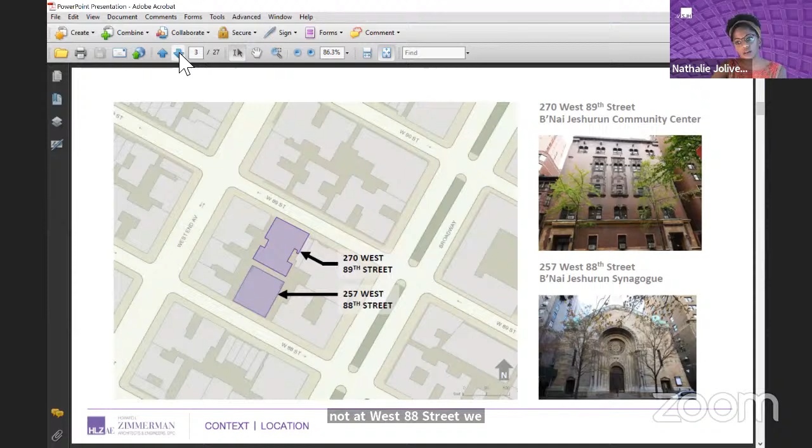So as Lauren was mentioning, the north facade located on West 89th Street is the most prominent. And then on the south, at West 88th Street, we have the very memorable facade of B'nai Jeshurun synagogue itself. Just to note, the two buildings are actually annexed, but they have separate BIN numbers, so they're treated separately under separate applications.

Okay, can go to the next slide. Over here, this is a closer look again of the building and all of its components, in relationship to its adjacent buildings and how tall they are. Our building, which is in purple, is a 7-story building with different heights. Then on the south, you can see that the number C is the annex or attachment between the community house and the synagogue.

Here in purple, we have in general notes, kind of an overview of the windows that are in scope. So all of the windows are in scope, but again, as Lauren was explaining, in this presentation we're mostly going to be concerned about the steel fire rated windows and the lot line facing windows. And this might be it in terms of context.

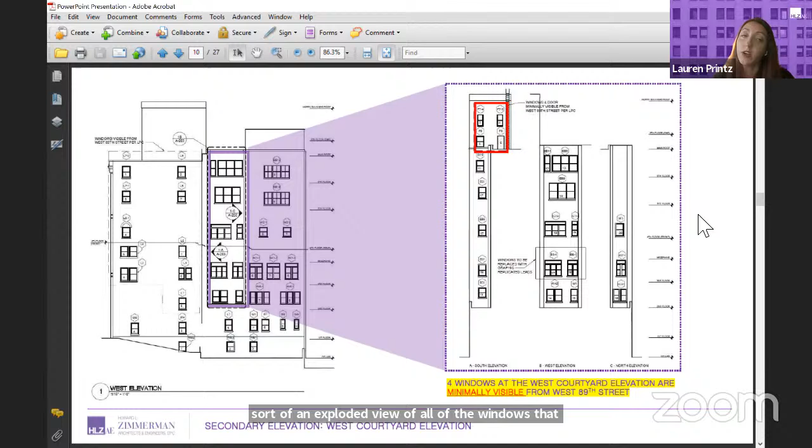This would be the visible steel fire rated windows from the west side of the building. And again, just showing you an exploded view of all the windows that encapsulate that west courtyard. Both courtyards are not visible from the street, but there are a number of fire rated windows located in these areas.

This is the best view that you can see of the south elevation. In this red highlighted box, we have 2 fire escapes that flank the east and west sides of the south elevation, which is important because a lot of our windows face the fire escapes. Along with doors and windows serving these fire escapes, it's extremely important that these items are operable. This is one of the sticking cases of our window replacement project to date, because some of the windows are inoperable.

They're well past their life. This is a very crucial part to maintaining life safety of the occupants inside the building. And of course, you can see the landmark Jeshurun synagogue in front.

So getting into the windows themselves, as some of you may know if you're familiar with the building, we have existing fire rated wired windows. I would say probably previous to the 1980s is when we started getting away from wired glass in fire rated glazing assemblies, and we went more towards clear fire rated glazing.

So what you see here is somewhat of a historic window assembly. We have a traditional fire rated steel double hung window that's prevalent all along the east, west, and south facades. And then what we have on top is what we call a modified sash or an applique.

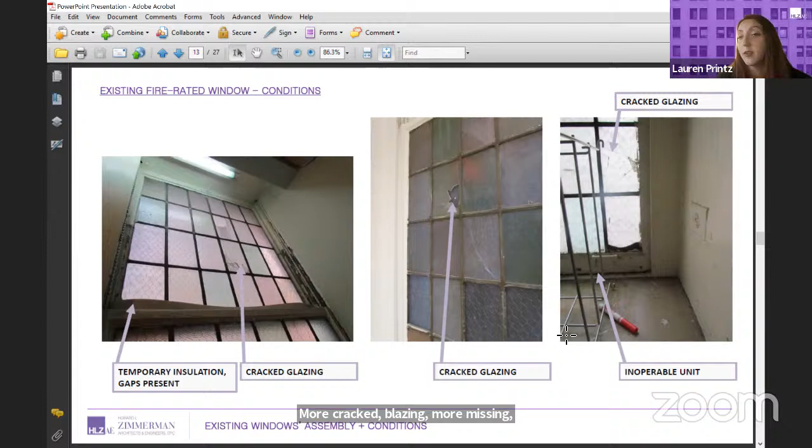This photo on the left is just showing you more deficiencies that we find in the classrooms and offices. The residents have taken it upon themselves to start stuffing insulation in the gaps just to get through the winters and also to keep energy loss low in the summers. More cracked glazing, more missing glazing that presents to be an issue. And again, a lot of the windows are inoperable.

I wanted to touch base on this space in particular. This is located on the 6th floor of the community house. This is their gymnasium for a number of their tenants or school-age children. The windows were in such a state of disrepair that they had to put some safety glazing up in order to accommodate the needs of that new purpose space.

The safety glazing has taken a beating over the years, but it's sort of doing its job. As a result, it renders the existing windows on the exterior of the safety glazing completely inoperable. You can't get to them at all. So this has essentially left the windows to continue to deteriorate in a state of disrepair, and there's actually no way of getting to them unless you dismantle this entire window assembly with the safety glazing.

So this is also becoming a large problem for B'nai Jeshurun, because as these windows continue to deteriorate, this is on a very high level of the building, on the 6th floor. So we certainly don't want these windows to be failing and any broken glass falling into the interior courtyards.

Now we'll get into the proposed product. Some of you may be wondering why we are presenting this to you. As you know, the wood windows are under staff level review.

That's the front of the facade, but the remaining 3 facades, because of the applied nature of the lead caming and the colored panes, our LPC preservationist advised us that that alone makes them a special window. The windows themselves aren't special in that they're square frames, either 1/1, with a fixed transom. So in essence they're not particularly special by LPC guidelines, but because of the applied applique done sometime in the history of the building, the preservationists felt that automatically triggered a public hearing. And so we bring this in front of the community board number 7.

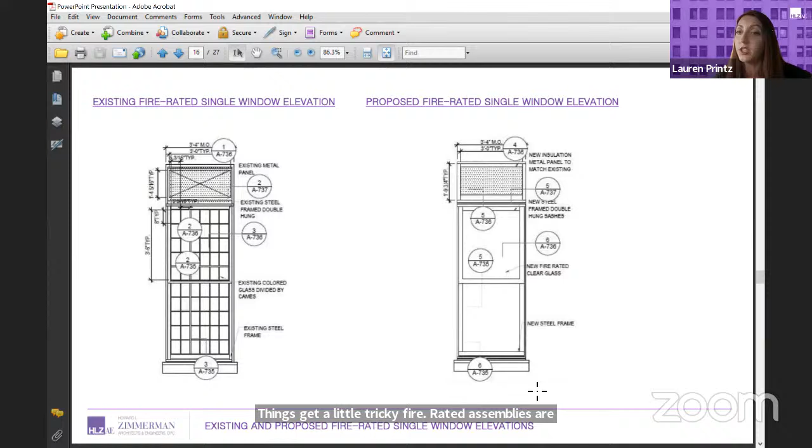In some ways, whenever you make an applique to a fire-rated assembly, things get a little tricky. Fire-rated assemblies are tested and UL rated in laboratory controlled testing. As such, modifications to fire-rated windows either have to be extremely custom through the manufacturing and also tested separately, or they're left alone.

Any modifications to a fire-rated assembly that is not laboratory tested or rated can essentially fail the rating and cause issues with life safety. So we made a decision between LPC and B'nai Jeshurun that we wanted to focus on the safety of this project, and that means giving them operable, clean, modern-looking, safe windows that they can continue to use their beautiful space with.

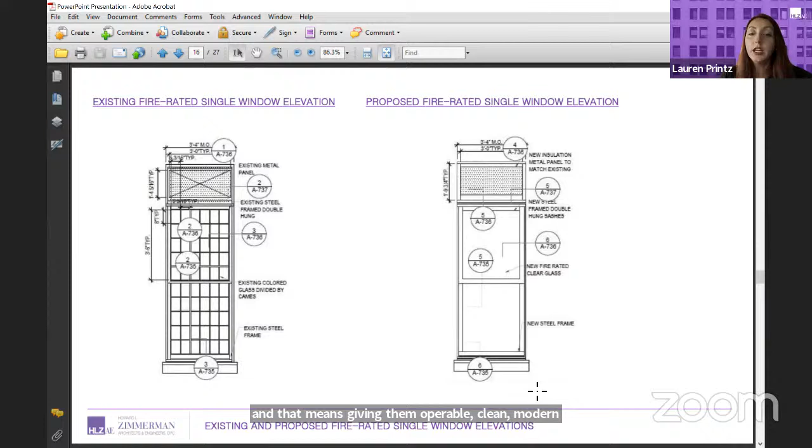So here we're presenting to you just one example of the many windows that are present on this building. Most of them are double hungs. Some of them feature transoms. Some of them also we have to accommodate existing HVAC ductwork or equipment that's already running through the existing windows. Hence why in this elevation here, we're showing you that we're including a new insulated metal panel, so it can accommodate their HVAC needs per space within the building.

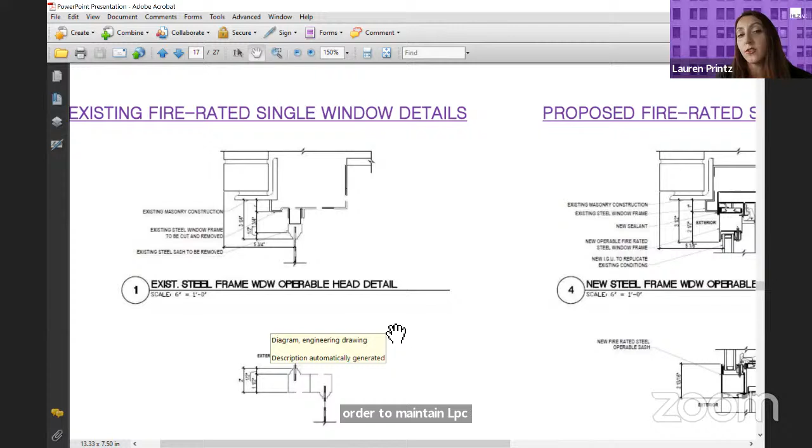These are our existing typical details versus the proposed fire-rated new window details. The important things to note here are that we are planning on salvaging small pieces of the frame in order to maintain LPC sightlines. This was something suggested and worked through between us and LPC. Over here we have the existing frame. It has a small lip here that comes down and returns up. The other thing important to note is, unlike other buildings you may have witnessed, the fire-rated windows here are installed behind the masonry lintel. They're installed within a masonry pocket in the wall. So we had to do some engineering in order to fit the new window into the existing pocket. But we did leave this small profile on the heads and jambs for LPC consideration, to make the windows best match the existing sightlines as much as possible.

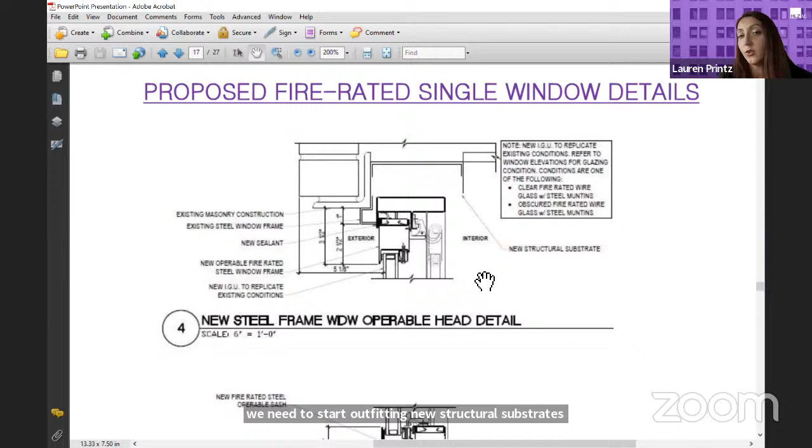We come to our proposed window head detail here, in which we want to maintain that profile that I was showing you in the existing. We want to salvage that, and the new window will be inserted into the old masonry pocket. Upon further investigation, once we get into bidding and construction, we plan to do some probes in the masonry pockets themselves, because we need to start outfitting new structural substrates and supports to anchor the new fire-rated windows into the masonry pockets so that they will be adequately secured to the building.

The sill details are very similar compared to the window we're proposing. Here we have a very nicely pitched window sill that we are intending to cut most of out and remove. Again, we are trying to salvage as much of the frame profile as possible. So you can see here we are proposing to leave basically three quarters of the entire remaining existing sill, and we want to insert our new fire-rated window assembly into that pocket. That way we maintain the existing sightlines from the exterior view.

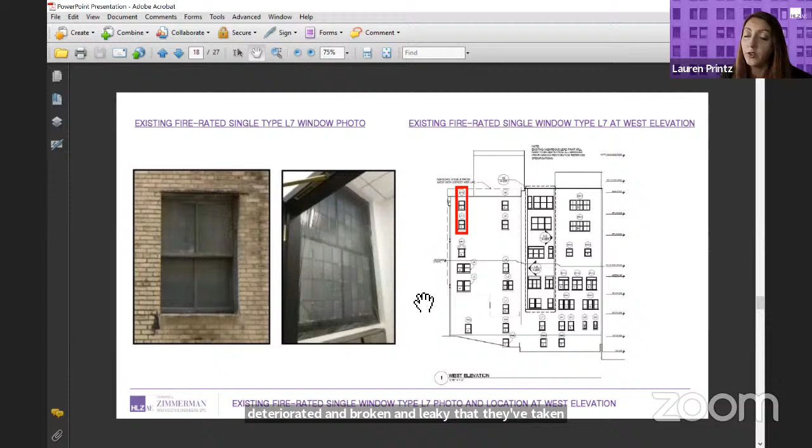So just showing you another example of typical fire rated windows. Now some of them have a muntin in the middle. And you can see on the inside here, this is one of the areas of B'nai Jeshurun currently where the windows are so badly deteriorated and broken and leaky that they've taken it upon themselves to put plastic over the entire window face just to remain comfortable.

So here, again, we are proposing to mimic the same configuration of the existing historic configuration without the applique. This shows that we intend to match the glazing exactly how it was. Some of these windows serve spaces that are bathrooms, locker rooms, or changing rooms, and for that reason we have to specify obscured glass to maintain privacy for the program of those functions.

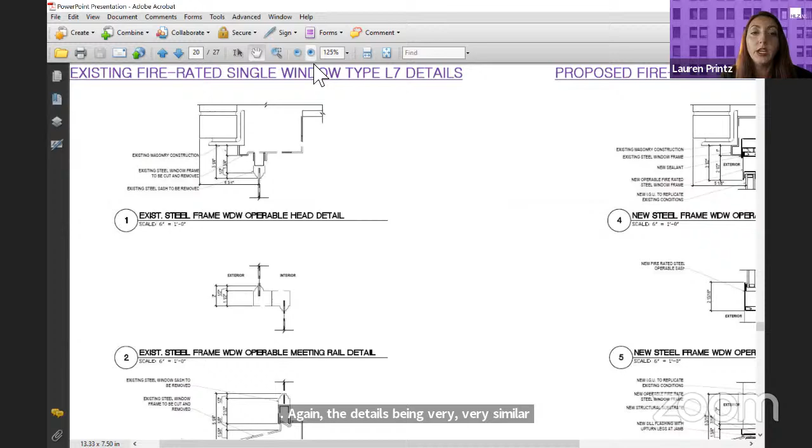Again, the details being very similar, really no matter what the type of window, we intend to keep the existing profile lip, installing a new fire rated window frame into the pocket. And then of course, the new structural substrate that we will be specifying once we get into bidding and construction. And the sill details are very similar as well.

These are just showing the windows in the courtyard, very similar to what you've seen before—double hung windows with a fixed transom. These are located in the east elevation courtyard.

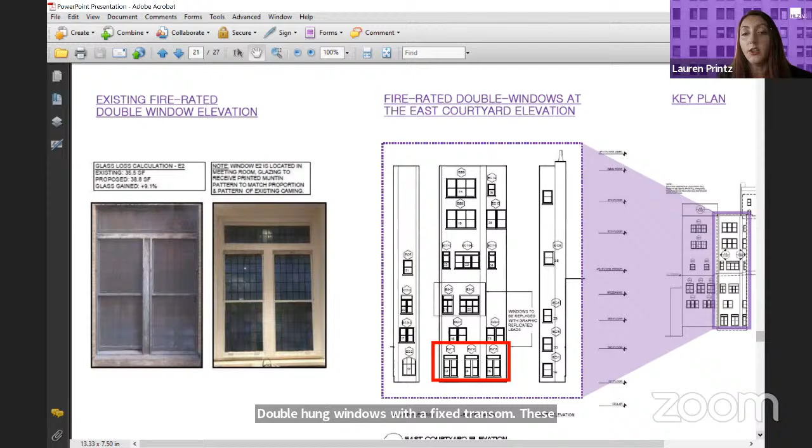If you notice, I'm only showing you some of the windows. The fire rated windows existing with the applied applique, lead caming, and colored glazing only really represent maybe 25 to 30% of all the fire rated windows. Most of the fire rated windows in this building are clear glazing with no lead caming or applique, and the details for these proposed options are very similar.

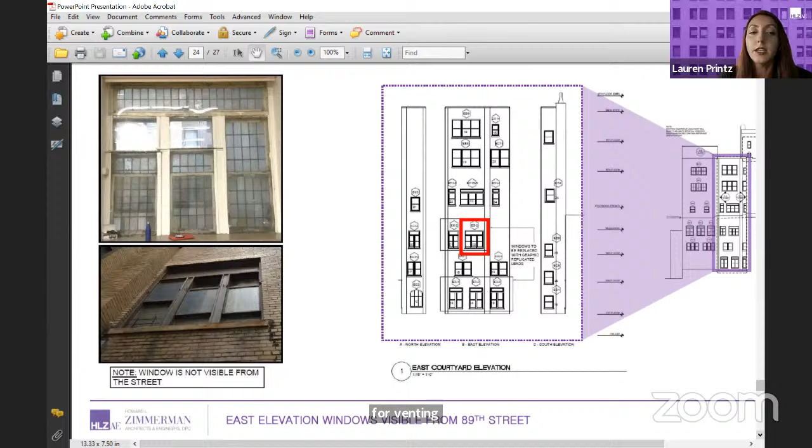It's another example of a triple configuration with the safety glazing. We intend to replace the safety glazing with options for venting when we get into the construction, to maintain the gymnasium program of that space, and again, to protect the windows. Again, very similar details, whether it's a triple, a double, or a single.

And that concludes the overview of our presentation. All right, thank you very much. That's a lot to take in. So I wonder, are there questions?

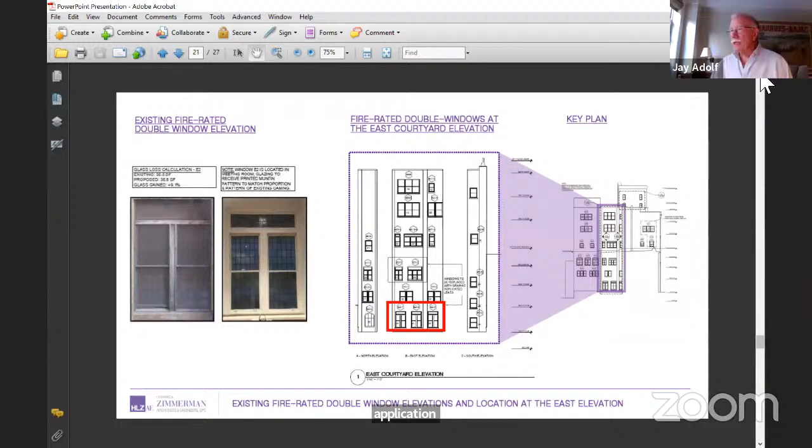You said that a certain percentage of the windows you're applying to replace have divided lights that are not really divided lights, but an applique to single-pane 1/1 windows or however. But how long has that configuration been in existence on this building? The applique, which creates at least the appearance of divided lights — we've been able to trace it to tax photos from the 1960s. Those were interior photos; I don't have any interior photos of the building that predate then. As we know, the community house has been around for a lot longer than that.

Yes, I know. All right, so my question is — I don't know if since the 60s, maybe Paige can answer this when she's speaking, whether that qualifies at all as historic. But my question is, being able to do this, I understand the windows have to be operable, I understand they have to be safe, I understand they have to be fire rated. So my last question is, with all that, why can't they be divided light windows?

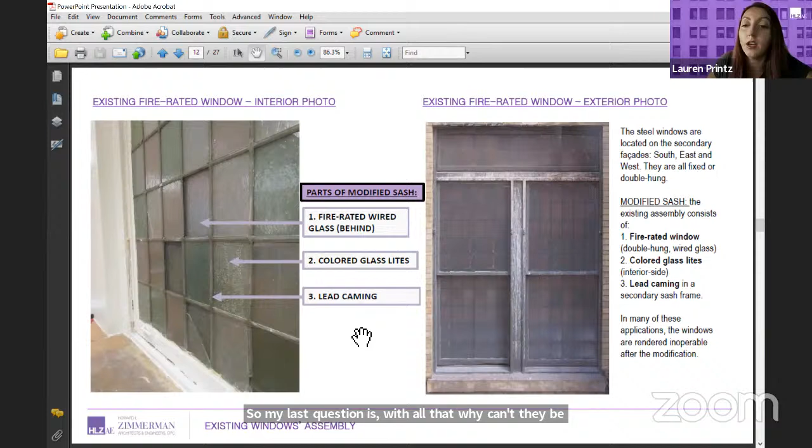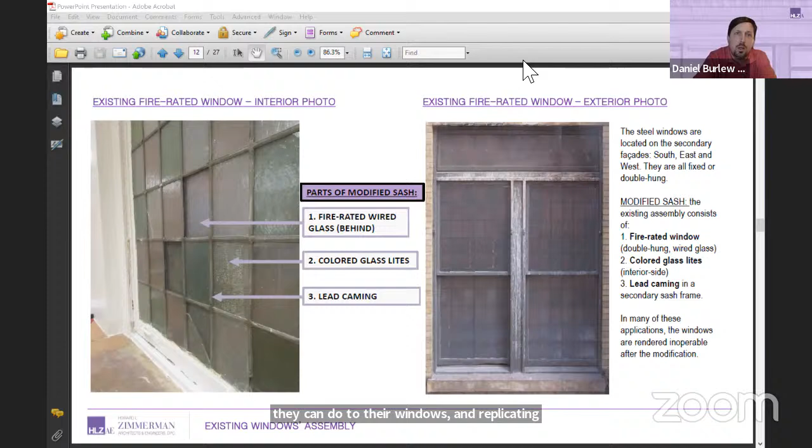Well, let me take that one, it's kind of window-technical, in my specialty. The product that's been specified, the double-hung window, is only available in the market to satisfy us because there's only one company that really makes operable, fire-rated windows, and that's Optimum. Optimum offers very limited modifications that they can do to their windows, and replicating the applique as shown, even with the grid pattern and omitting the colored glass, is not something they're able to provide.

So they're the only company — it is the bane of my existence. I mean, we have all kinds of window replacement applications before our board, and correct me if I'm wrong, but I assume that when all of these window replacements are done, they all have to be fire rated.

That is a very fair assumption to make, and I have run into this over my decade-long career in fenestration, dealing with windows and doors. If you need a fire-rated double hung, I believe it's 90-minute, actually, Lauren, that we're installing here, not just the 45 that code mandates.

So then we may have some more options in front of us, but right now our main player is dealing with Optimum, and I can tell you the other fire-rated manufacturers customize even less than they do. The main challenge with replicating the caming is how narrow it is, making them even a simulated divided light would be difficult. A true divided light would be almost impossible for a double-pane glazed window, and even for a simulated version, they don't offer the ability to put the muntin in the center of the glass.

So it would be very apparent that it's masquerading as something it really isn't. I'm surprised, I have to say, that that's the case, but I take your word for it.

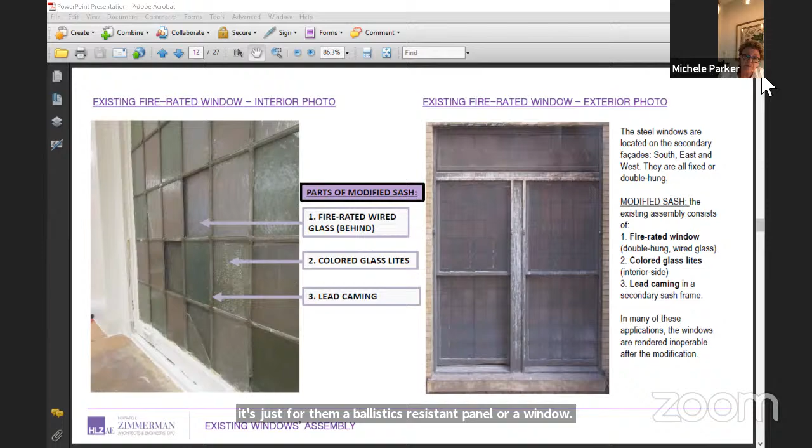Every single window will also have a ballistics resistant panel or window. Every single window will be ballistics resistant. No, not every single window, let's clarify that.

To the front facade, the historic photo works just fine. So the three windows that flank either side of the main entrance doors on the ground floor, those windows in particular were requested by Jeshurun to install a ballistics resistant safety glazing assembly on the inside of the window. That has already been installed.

That was a little bit of a hiccup between our scope and the community board 7 representative, because that work has already been installed. It didn't require LPC review because it was installed on the interior, which you can't see from the exterior. Not even at staff level. Staff didn't even review that with you.

No. Okay, now the doors were replaced under a separate application, a permit for minor work. They also have the same ballistics resistant safety glazing and door assembly in those two doors. So in case you're familiar with the building and notice new doors there, the reason was safety concerns. It's hard to see because of the scaffolding, but you will see it one day.

All right, I think I have one more question, bear with me. You said the 6th floor is used as the gymnasium for the school, but there are some windows you want to do something with to keep the privacy. Which windows are you glazing, or are you? So it's two things.

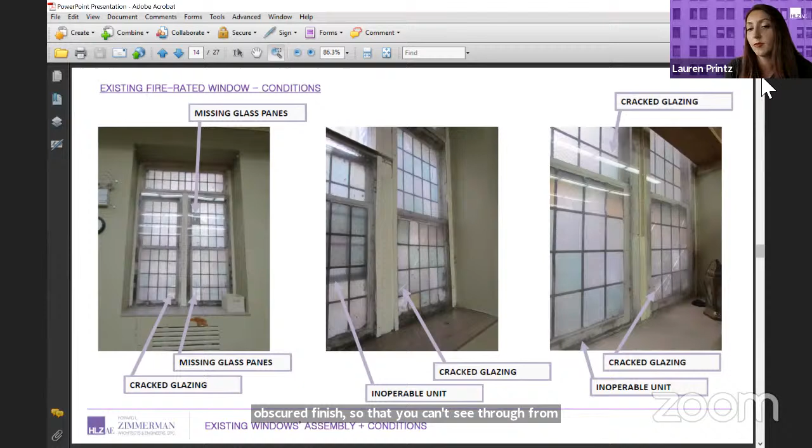And then you're talking about the obscured glazing. There are some examples where these windows face bathrooms, changing rooms, and locker rooms. Those windows will contain a fire rated glazing with an obscured finish so that you can't see through from outside or inside. Let me just hold on for a second.

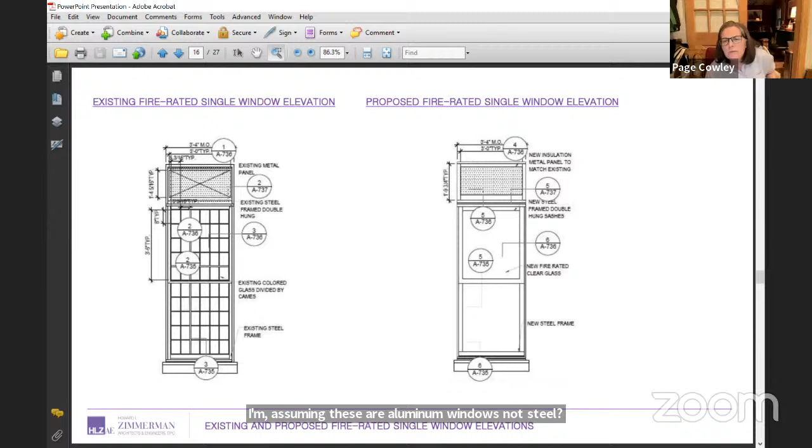Right, correct. The concern I have is here—there are ways that you can recreate, not for all of them, I wouldn't ask that of you, because not every space needs to have these beautiful pastel colors. But what my practice has done for other churches we've worked on is follow as closely as we can with the steel window. I'm assuming these are aluminum windows, not steel? No, the windows are being replaced with steel fire rated windows. Okay, because I didn't see—oh, there it is, new steel frame, my bad.

Once these windows are removed, you won't see any color on this building, and this is one of the charming features I feel of it. And the fact that you can see it through the center of the block is testament that I think it would be a shame to lose. And I would challenge you to rethink how you can keep the colored glass, at least for the majority of the spaces.

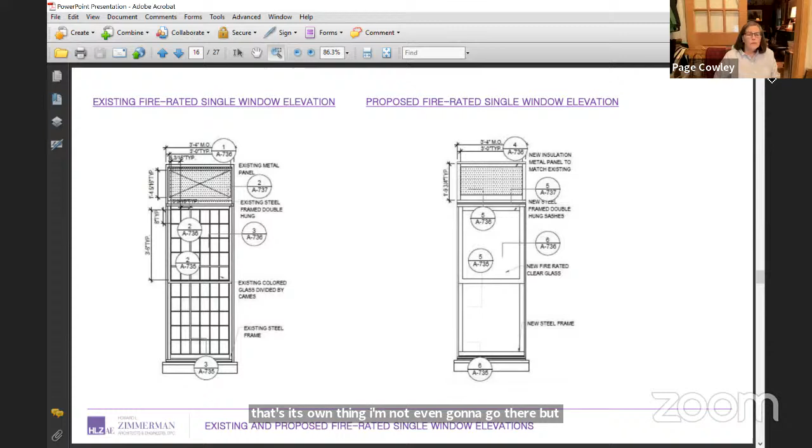So right now I'm sitting on the fence and having a very hard time trying to accept this design alteration. Page, thank you for that, it's very insightful. It's obviously nothing new, as I told you, I've had this application open since 2017. Certainly nothing that hasn't come across our thoughts before. We've been working with Colin for a very long time to get this to where it is.

What I can tell you is a couple of things. The windows that we're proposing to replace, I wanted to show you this elevation in particular. All of the special windows that I've shown you are actually below, adjacent to the synagogue, and also inside these interior courtyards. So they're not quite as visible to the street as we're somewhat presenting them from this bird's eye view.

The other thing to note is that, as I said, we spoke with Colin about this, and there are conversations about possibly doing something on the inside to speak to the historic integrity of the building. However, we are not necessarily putting that under our LPC review because it's not on the facade level—it would be interior to the building, which you wouldn't see from outside the street.

Can I ask you one other question? Thank you for your explanation. I'm not convinced yet. But the other question I have is about the ballistic glass, the impenetrable one for the windows. I'm assuming these are going to be operable as well. And where are those ballistic glass windows going to be installed?

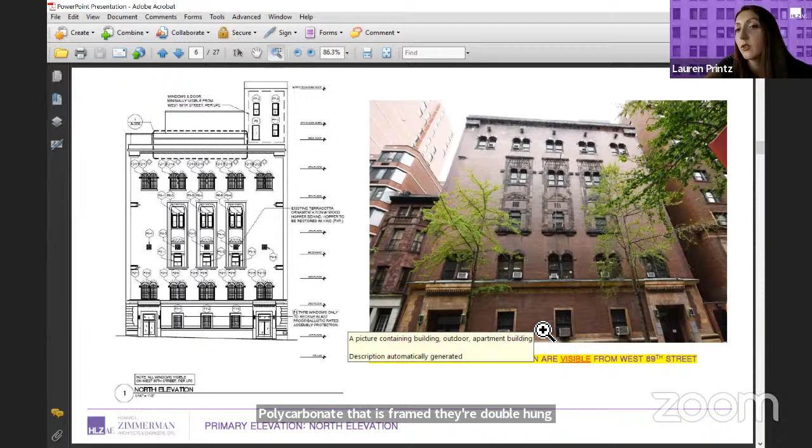All right, thank you, Page. One item I just want to stress, and Page, thank you very much—that's wonderful to hear another architect say that about a building. The main integrity of the building and the stained glass on the north face is going to be maintained. Everything of that is going to come back. These are secondary facades that are largely invisible to the street that will be undergoing this modification.

And the other part I want to stress is that we are trying our very best to actually match the existing sight lines that are present there now. That's part of what Lauren talked about in the cutting of the frame and inserting the new window within it. Doing so allows us to match the historic integrity of the building and its sight lines. And while we may be losing that lead caming element, we're at least trying to preserve that much with it as well.

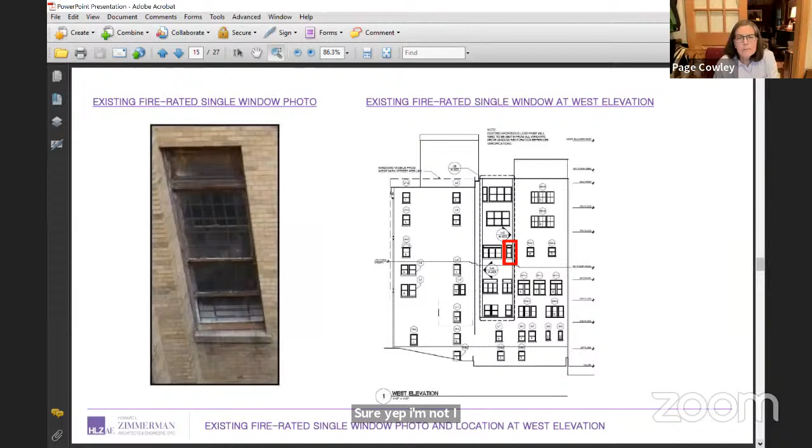Do you have a drawing of that you could share with us? Sure. I can't remember—in your presentation you showed us so many variations. It's this one. The details for the single, double, and triple are largely the same.

But if you'll note, the 3 and a half inch sight line is roughly the same. So this area here—overall the sight line we are trying our very best to maintain from the masonry opening to the glass. That is definitely our intention here. I believe the frame is 3.5 inches, so we're hiding almost a third of the frame behind that existing cut profile. So you're going to see an exterior frame view of around 2.5 inches.

May I speak? Please, Colin. So Page, I appreciate what you shared, and I just want you to know that we're really trying to thread the tension between what we need to do to maintain the building, make it safe, and make it environmentally sound—while also respecting the historic integrity of the building, but also in the context of a very different use case. For example, the gym, the third floor space, was built as a ballroom. Most of the building as imagined and built in 1929 is very different than the way it is occupied today, and we're trying to figure out the best approach.

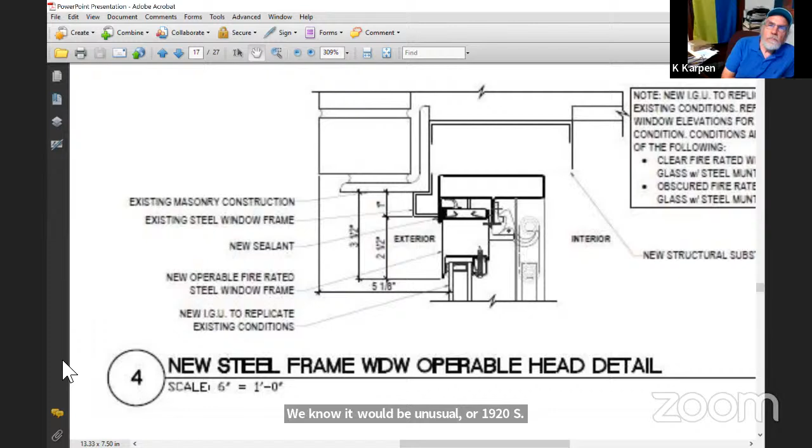No, it's not. I won't say it was common to apply glass on top of glass. I've not encountered this, although I can't claim to have seen enough to know all. But this is certainly a special case where they've welded this lead caming onto the existing window frames at some point. I won't say definitely, but I can tell you it's not a standard feature of the classic Pomeroy steel frame windows that these appear to be. So they were definitely added, whether immediately following their installation or sometime after, at some point leading up and all the way into the 60s.

We can't be sure where in that time frame between the early 1900s and the 1960s they came in. So a related question that follows is whether the designation report, when the building was designated for the district, addressed the question of whether the caming and colored glass was original or not. Silent on the issue. Okay.

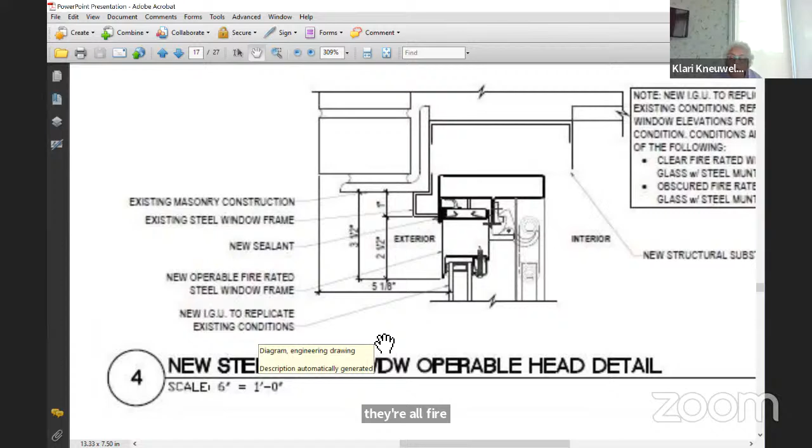It makes very little difference. The other question I had follows up on something Jay asked a while ago, and it's really for my education here and maybe that of others. I think Jay's premise was that in the many other window replacement applications we've had, they're all fire resistant windows. That's not been my impression. My impression is that these fire rated windows are relatively unusual and not what we typically see in window replacement applications—you may not be familiar with that because this is your application and the others are not. But what is it about this situation, this building, that requires fire rated windows, if it is indeed the case that that is not generally true with window replacements?

It's the proximity to adjacent buildings. The lot of the community house is very small, and the distance measured from the property line to the next property line is too small for you to have a non-fire rated exterior enclosure. I see, so they're not lot line windows, but they're close to lot line windows, and that's the reason you need fire rated windows. Whereas I would think the vast majority of window replacement applications we see are not required to be, and are not, fire rated. Is that right?

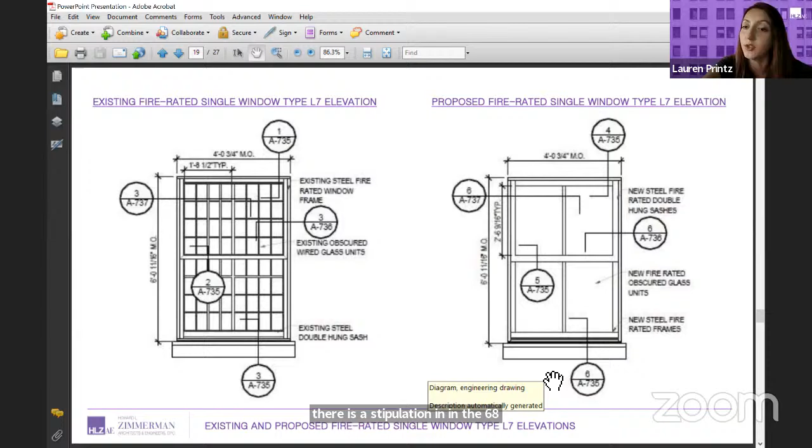And so there is a stipulation in the '68 code in which the only exception to this rule is churches specifically, and we could not make the case that the community house is a church. So we find ourselves defaulting to the conservative code, which is fire rated windows, which also supports the existing window assembly we see installed. So we certainly wouldn't want to ever reduce the fire safety rating—we would only want to meet or enhance it.

Thanks, this has been educational and I appreciate your answers. And in order not to speak a second time, I will say that with regard to the caming and the colored glass, while I don't love the fact we're not going to see it back, I can support this, will support this as presented. Thank you. Thank you, Klari.

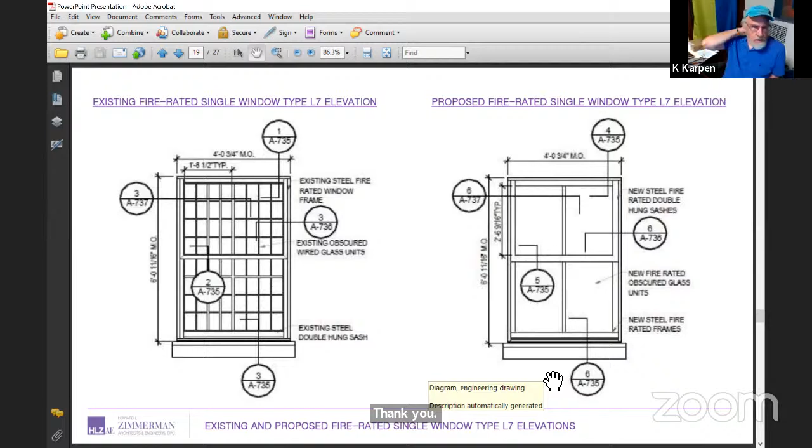Any further questions from the committee? No, Leaf, okay. Page is waving her hand. I forgot to ask one question—sure. Are you using wired glass, or since you say obscured glass in the windows, is it going to be wired or obscured?

Most of the windows for clear glazing are going to be ceramic fire rated glazing. They will only be obscured in areas of bathrooms, changing rooms, and locker rooms. And no wire glass? No wired glass in this application. Okay, thank you. Sure, all right, thanks.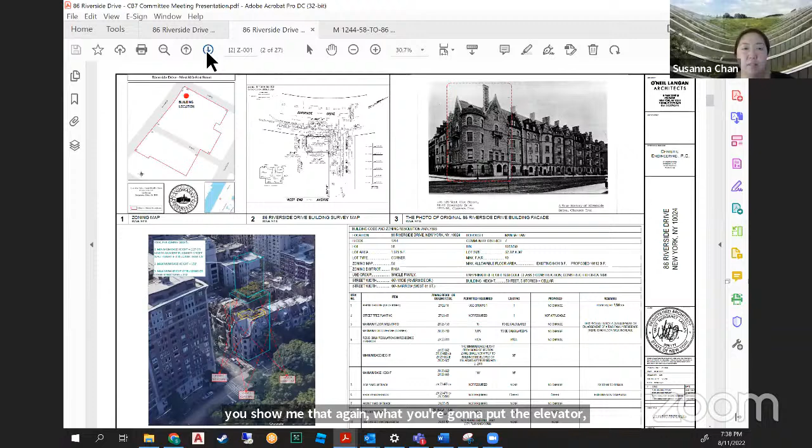Could you show me that again, where you're going to put the elevator? Sure, Susanna can you advance for me? I think we have a lot of zoning pages in our presentation. We could skip through those because we are within our FAR, we don't exceed it.

I should mention we are also planning on replacing the entire roof. The roof tile, the Ludowici roof tile, is in disrepair. The roof has been leaking. It also has what we think is a painted metallic coating on it now. Our proposal is to replace that with a roof tile, and we have some samples of it in the presentation. We'll show you the coloration.

The area that we're planning to add on to, to make the addition, is the areaway. Susanna can show you, it's the portion in the southeast corner. It abuts the two neighboring buildings, and right now it's a shaft that goes down to grade and actually down into the cellar. So we'll be using that space for the elevator.

The elevator bulkhead is the area, this area here, is the elevator bulkhead. The space to the east and the south of it will house condenser units and mechanical equipment, which would not be visible from the street. The bulkhead, which we're proposing to bring up to this roof level for a stair, is this area that we're showing you here.

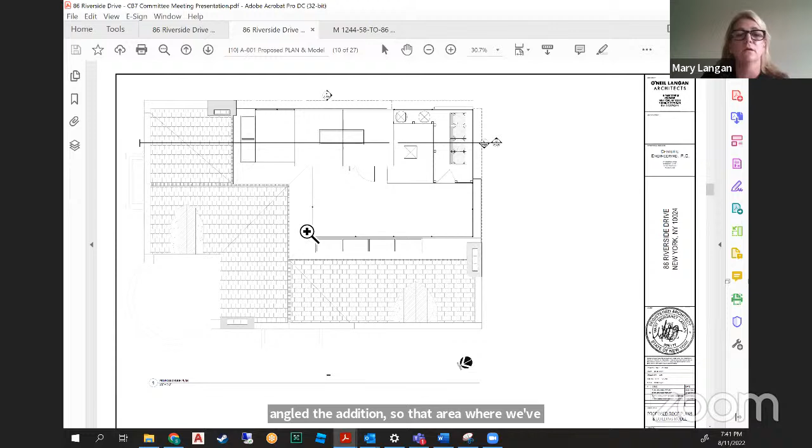Yes. We have been working with Landmarks on this project, discussing the best ways to make a proposal that is amenable. One thing we've considered, which you can see in our diagrams, is pitching our roof addition up and away from the existing roof line. So instead of building straight up, we've angled the addition, so that area with skylights and sloped roof comes up from the existing ridge line.

The drawing here on the left shows the existing Riverside Drive facade, and you can see the existing ridge line here, as we've been discussing. In drawing 2, that's the proposed addition, showing the existing ridge line being maintained, and then a new sloped roof with a flat roof set back from that, with an aluminum cable rail. We've also worked with Landmarks on whether they would prefer glass or a cable rail, and they preferred the cable rail. We're also showing in this drawing the stair bulkhead as it comes up.

For that stair bulkhead, we are proposing a limestone agglomerate material, which would blend in very well with the existing limestone on the facade of the building, which we will, of course, restore, wash, and repair.

Can you show the section the other way? How far is that from Riverside Drive? This is the 81st Street facade here, and then I'll show you the sections. So here you can see the existing ridge line, and then the proposed addition with the sloped roof coming up with the skylights, then the stair bulkhead, and in the distance the railing.

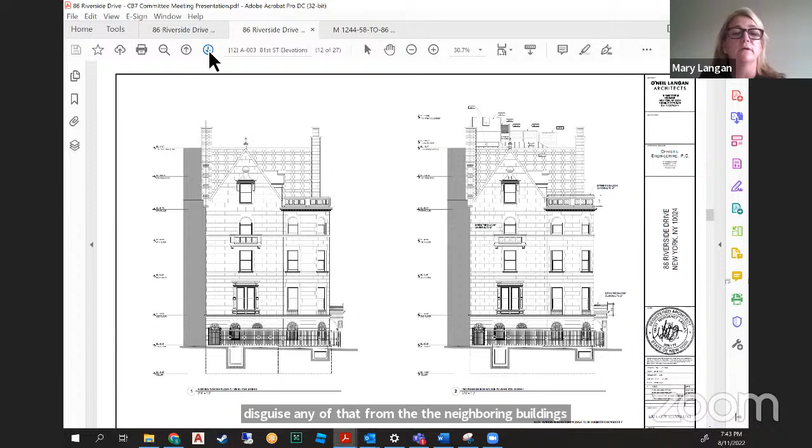So the sight lines from Riverside Drive, you'll be able to see in the section. Here we go. So the existing ridge line, as you can see here, this is the 81st Street facade. The existing ridge line comes up, it's quite a steep pitch on the existing ridge, and then we're sloping it back, and then we begin our rooftop addition. So the existing roof is at the level where you see the stair starting to go up.

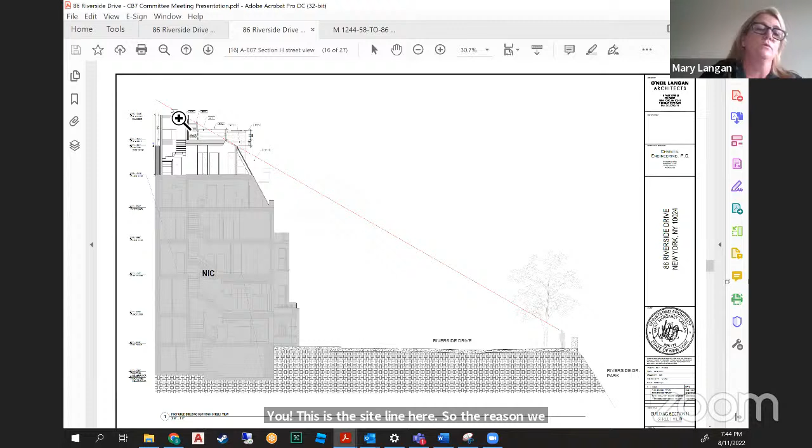That's a flat roof that's currently not habitable space. If we can go to the other view, the other sight line from Riverside Drive and from the park bulkhead, this is the sight line here. So the reason we pitched that roof back off of the ridge was to give us some maintenance of the ridge line, and also to alleviate much of the bulk of the addition on the sight line there.

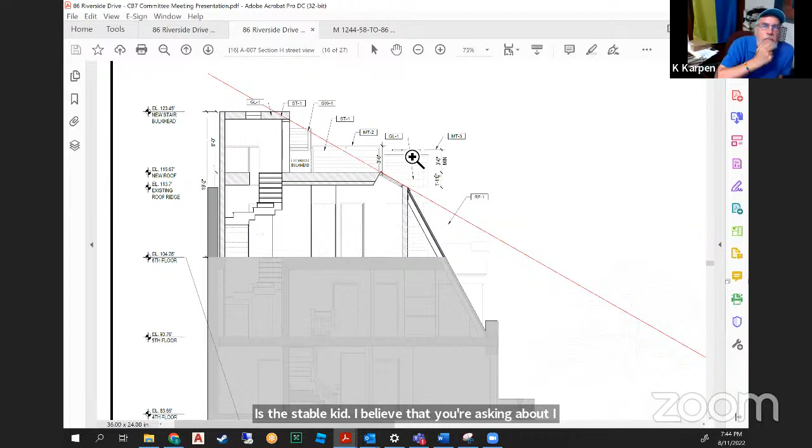What is that? There's a part of the addition that seems to go beyond the slope there, or what am I looking at? That is the stair bulkhead, I believe, that you're asking about. No, I think, are you looking at GL1? That's a chimney, right? Yeah, what is that? That is the existing chimney. Okay, yes, so that is at the south face of the building. It's at the party wall.

I think if we go back to the facade photos, it'll be easier for you to see. We have made a mock-up of the proposed addition, which I see in the Q&A someone commented on. We have had a contractor build it with orange fencing and 2x4s. We've had him build the heights so that we could see them and study them.

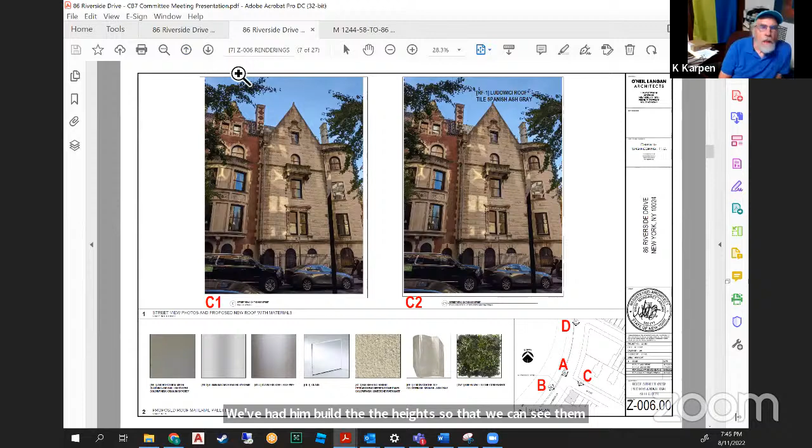So you can see the chimney on the 81st Street side here, and also there's a very thin chimney on Riverside Drive. Those will be maintained. I would like to point out in this slide the materials, the roof that we're proposing, the glazed Ludowici tile, the limestone material to clad the bulkhead, and then any windows or skylights would have a gray mullion system on those, and then the aluminum railing.

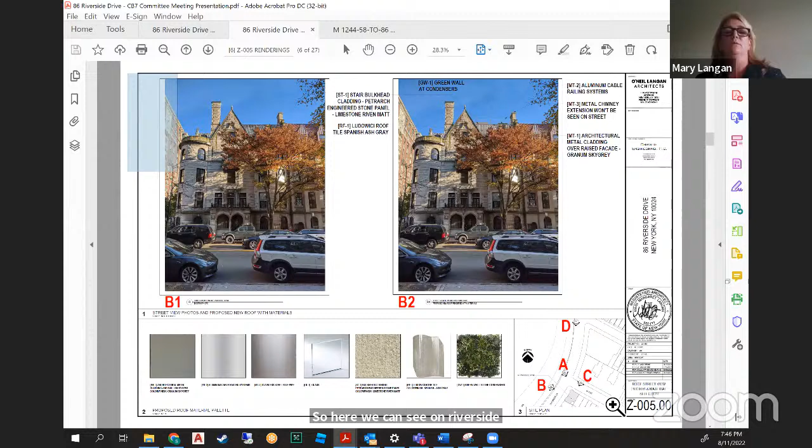Maybe Susanna, if we can go to the Riverside Drive photos. So here we can see on Riverside Drive, this is what our proposal, what you would see from the street. We based this photo montage on the orange fencing and 2x4 mock-up that we did. So you can see B1 is the existing. You can see the continuity of the ridge line along Riverside Drive with the neighboring buildings. And then our proposal, you can catch the top of the stair bulkhead from the street. And then we are proposing an observation deck on the roof, which would have an aluminum guard for safety on that flat roof.

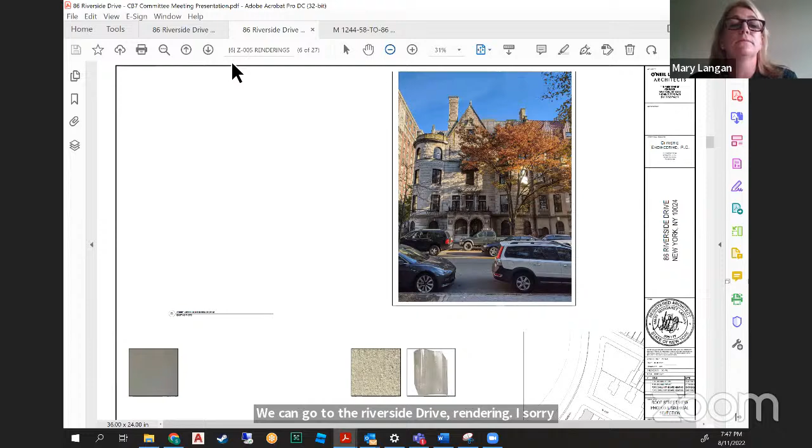If we can go to the 81st Street rendering. Should I keep advancing there? Yes, so this is the 81st Street view. As you can see, the neighboring building also has a rooftop flat roof addition. And if you could go back one, please - there's a precedent, the neighbor has also a similar type of railing on their flat roof deck. And if you can see on C2, that's the extent of what you would see from the street for our addition. So you really don't see much from the street here.

Yeah, and the other half of this. Yes, Mary, sorry, I have a question. You keep saying from the street, can't see from the street - do you mean from any public way, including Riverside Park, or do you just mean from the street when you say that? We also are looking at it from the park as well, yes.

The park does have a steep embankment. I will point out in our presentation, as Riverside Drive curves down toward the south, this D2 is the place where you would see the most of this addition, and you can see it through the trees here. We have worked with Landmarks to determine that the coloration should be a limestone type material so that it blends in with the rest of the building here.

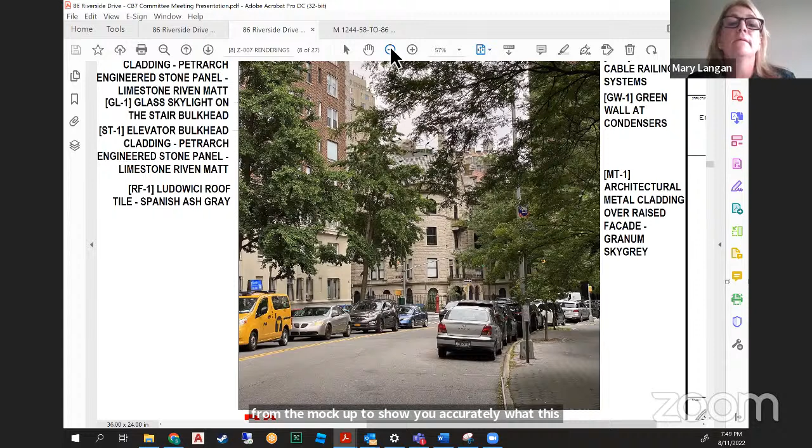All right, other questions? Yeah, I have a question. Madge? I have a question.

Okay, what's the additional height? Because from these, it doesn't even look like there's any additional height. How much taller is this? And is it above the chimney lines now, where the bulkhead will be, in the tallest part of the addition? It is above the chimney line on Riverside Drive and also on 81st Street, but it's set back. And because those existing sloped roofs are such a high pitch, that's why you really don't see it as much from the rights of way.

The addition itself, from the existing flat roof, which is behind the gable roofs, that addition of the new roof is an 11'2" addition. How much? The height above the ridge line is 1'11". So, yeah.

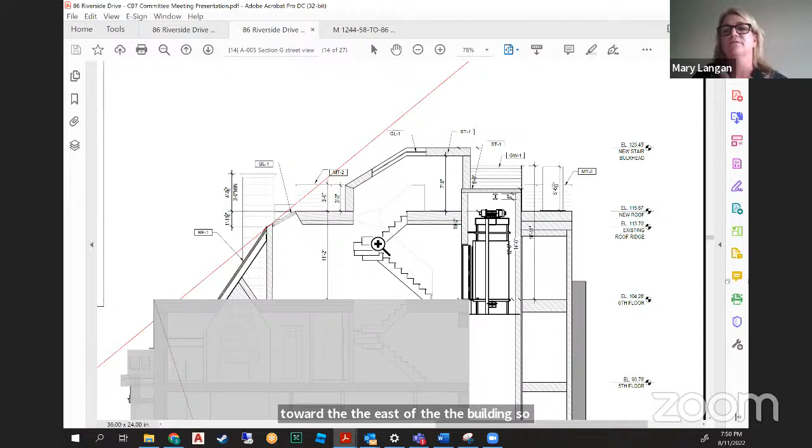I beg to differ. I live on 80th and West End. I've walked by this building a couple thousand times in the 45 years I've lived in the neighborhood. I took a walk there yesterday. I could see the mock-up, which is bright orange, from 80th and Riverside, 81st and Riverside, 82nd and Riverside, 83rd and Riverside. Then I went into the park and walked from 83rd back down to 79th, and I could see the mock-up at though not at 79th Street, but every other location.

I'm not sure that anybody walking in the park would notice it because they're looking at the park. And I'm not sure it makes a difference that we can see it, but I could see that mock-up every place that I walk, as I described.

No, I wouldn't argue with that. You can see the orange mock-up. Yes, that is true, it's orange. But like I said, I'm not sure that somebody walking on Riverside Drive would notice, or walking in the park would notice, because that's maybe not typically what they look at. But those of us who have anything to do with preservation are always looking up. But I'm not sure it matters.

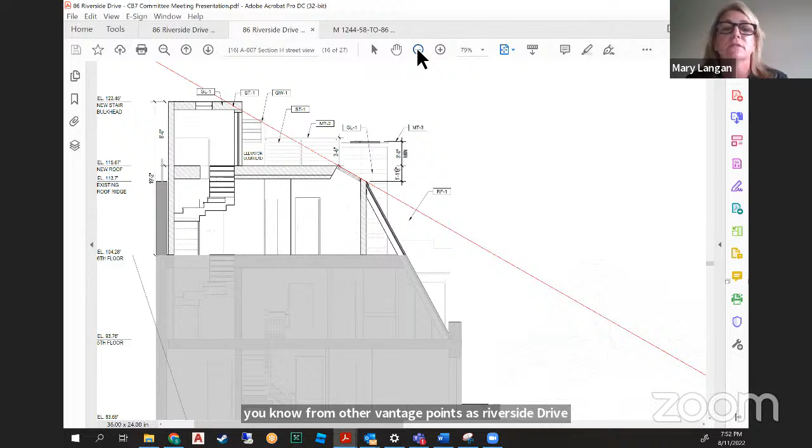Right, and I did point out, and I will stress, that as you come from especially from the north to the south, and from other vantage points as Riverside Drive curves around, you will see that there's a difference here. Our proposal is to make something that is harmonious, so it doesn't stand out like this orange mock-up that you're referring to, Michele.

How long is this project going to take? Because I agree with you, I got a little peek inside also. There were some guys working on something. I can't say with surety, but we are ready to start construction as soon as we can get this part approved. We have been working with contractors to get some early works into motion, and obviously this is a single family residence. Their children go to school on the Upper West Side. They would like to be in this house as soon as possible. But that may not be.

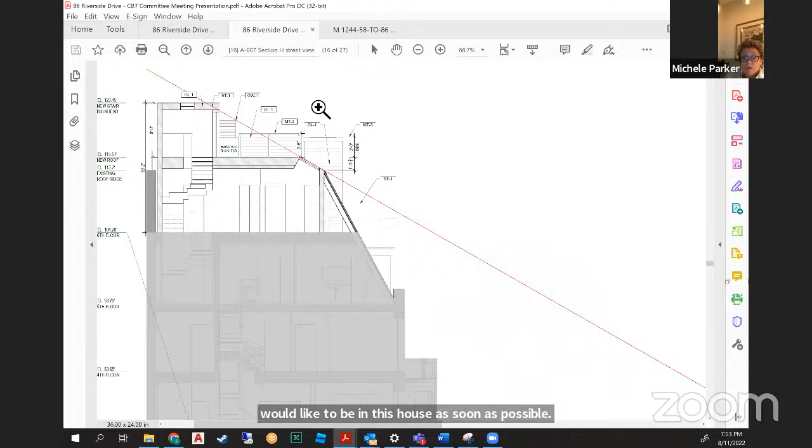Thank you. We have Mark and we have Clary with questions. You mentioned a limestone something or other cladding for the addition, and since it is at least a little bit visible, I would characterize it as minimally visible, but still visible. What is that going to look like? Is it going to look like that sort of puckered stucco effect, or will it look smooth?

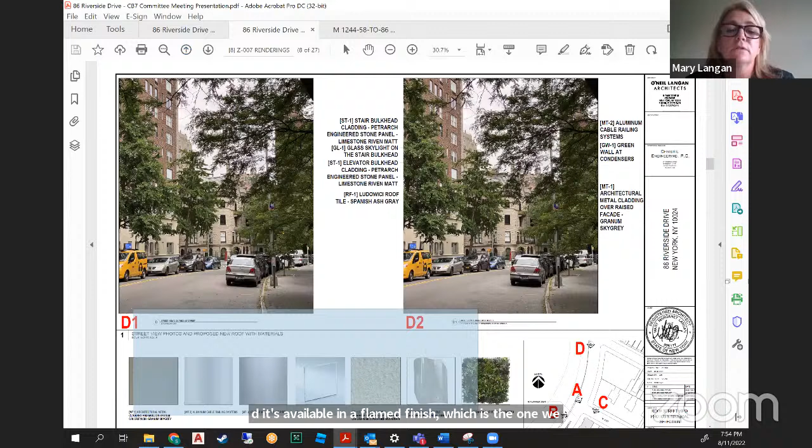What will we see? The material, it's a limestone agglomerate. It's called Petrarch, and it's available in a flamed finish, which is the one we have chosen. The coloration is very similar to the limestone that's on the building. The limestone on the building has many textures - it's combed, it's rusticated, and it's flat. So this is the one we've chosen. It does have, as I said, a flamed finish, so it looks a lot like what stucco would look like. It's just that the composite is a different stone material.

Well, it's not stucco. It comes in panel sizes, so it does replicate the coursing of the limestone. It's not a troweled on finish, it's a stone panel. Does it have seams or gaps or any of that sort of thing? It would have a joint, just as the limestone does. It can be applied with clips, it can be adhered to the building, or you can put mortar joints in it.

Right. So in response to what Michele said, I exercise, walk in Riverside Park all the time. And when walking north, what I always do is look at the roof lines and the buildings along Riverside Drive. So I'm sure that she and I are not the only people that do that. I suspect that many more people than Michele has referenced do that.

One of the purposes of our landmarks law is to protect views, not just from the street, but from the park. Second, I hate this - I guess it's not our issue, but the fact that a family, however big they are, can't find enough room in a 6-story house because the elevation shows 6 stories, including the basement, and needs a 7th story is not a sympathetic situation, I think, in our current environment, but it's not our issue.

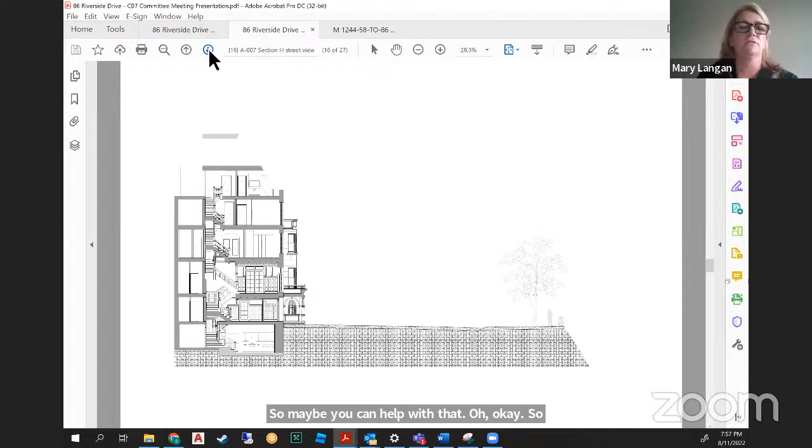Okay, so the addition is really on the 6th floor plate at that roof line. And these are the photos of that we took on site. I think, Suzanne, if you want to go to like the park view, the ones on the bottom.

So when we made the mock-up, we did study it. Did you show us these before? I must have missed it. No, I'm sorry, these were in the zoning part of the presentation.

Oh, okay, well, to me this is very important because it's showing really a lot up there that you're looking at from Riverside Park. And it doesn't look good. I mean, it wouldn't be orange, obviously, but it's a lot up there.

Way visible, and visible, as Michele has noted, and you've agreed also, substantially from the north as you approach from 83rd, 82nd, et cetera. This is a much better visual aid than what we had focused on before.

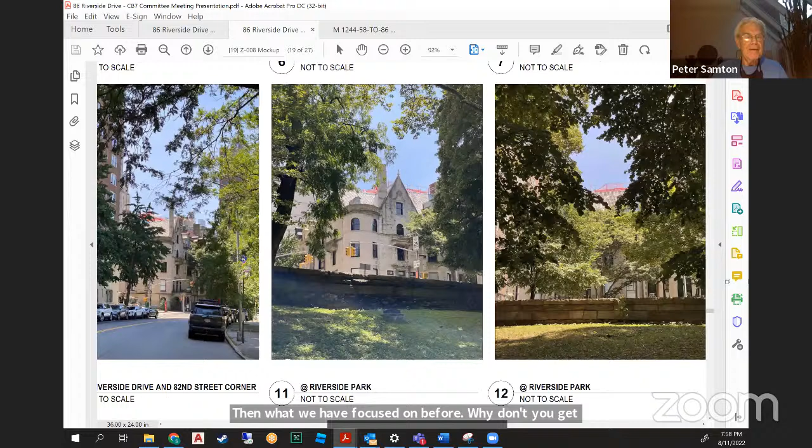Why don't you get away from the trees? The trees are in front. Got to cut down those trees, Peter.

Well, I guess that's the questions that I have and the comments, but my overall comment is yuck.

All right, Susan. I agree with Klari, and I have to say, I find it very frustrating to see a presentation like this - it's just very frustrating. And I'm not going to be able to support this at all. I just agree with everything Klari said. No, I'm not either. I feel like it's really disingenuous to show the presentation this way. It's just not appropriate.

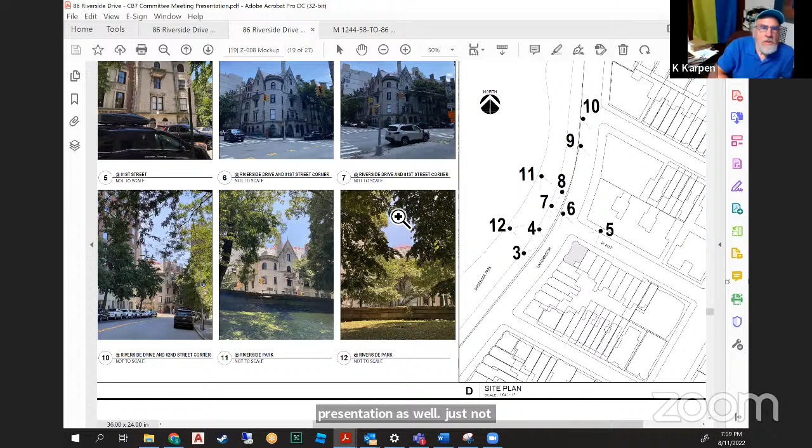All right, thank you. Michele? Yeah, I maybe missed this - could you talk about the glass enclosed stair bulkhead? We have amended that as we've worked with Landmarks. They have asked us to make the glass enclosure into the solid enclosure that we're now proposing with the Petrarch.

And can you point to where that is in one of these mock-up pictures? Even though, can you point to that? I mean, you have the goddamn trees in front of the building. You can't see anything.

So the Petrarch, the portion that would be clad in the Petrarch is the tallest portion at the back, right there. Yeah. That's the stair bulkhead.

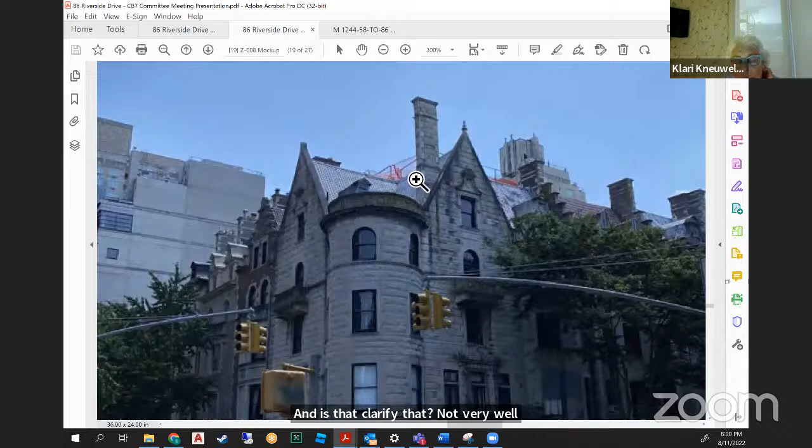Okay, does that clarify that? Not very well, in my view, but it's helpful. I mean, it's better than not having asked and gotten the answer.

I think you can see it if we go to the montage that we did of the streetscape. We can explain it that way because obviously the mock-up is the fencing.

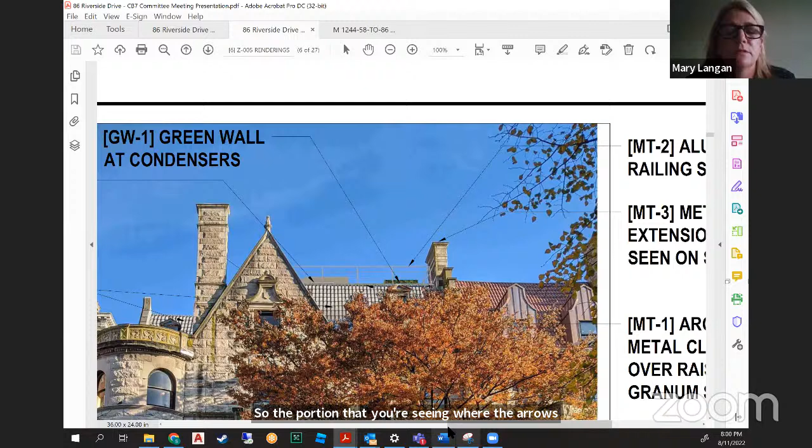So the portion that you're seeing where the arrow is pointing and the cursor is, that's what you would see - that's the stair bulkhead. That's the part that is proposed to be clad with the Petrarch.

And then what's the other bit? That's fencing? That's railing, yes, that's the aluminum railing. And then the portion that you see just peeking up over the ridge line is the green wall that will shield the condensing units.

But the green wall is significantly lower than the elevator - what was glass and is now the bulkhead for the stair, yes, that's not for the higher elevator. It's the green wall that does not obscure that from the public ways, including the park.

Okay, got it. Can we stay on that slide for a second and let Klari finish if she's not done? I think I am. Okay, so if we really just try to stay on this slide for a second.

I'm seeing lines now that I had not seen before. My bad.

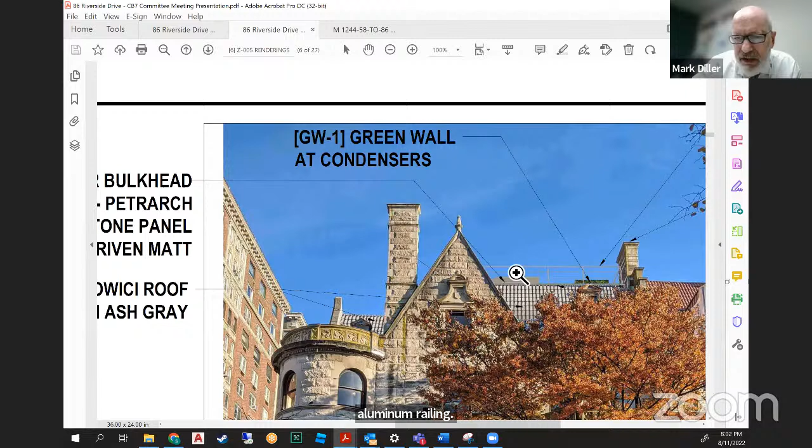Is there a railing that's visible from the street? Yes, the railing is the aluminum cable railing. Is it going to be visible just like that? Yes. How tall is that? Well, it's a guard, so it's 42 inches above the height of the roof line. If the existing elevation is 113, it's 42 inches above that. You don't really show it very clearly.

No, you don't, and the drawings didn't really show it that clearly. That's very unfair. We can go back to you not being straight with us. Yeah, I really don't appreciate that.

Can we call the question? No, I'd like to ask another if I could. I've got some questions from Madge and from Jay as well. Yeah, more continued education here because I'm really trying to like this. Why are you trying to like it when it's visible from the public way? Well, I haven't succeeded, Susan, so don't worry yet. But let me ask a question.

All of the thing that looks like a zillion pane windows, with all those little squares, below where those two arrows are, where a dormer window is set in and the gable is on the left - what's all that in between? Is that currently there? Is that the current roof? It's gray, it's got a million panels. What is all that? That's the existing roof. So the existing ridge line is being maintained there.

And all that existing roof is made out of what? It's tile, it's Ludowici tile, the same tile that's been used in all of the buildings to the south. But the tile on the building to the south is red. Red, yes. The existing is a grayish. Is that right? As I stated, yes, the existing roof has been coated with some kind of metallic. Oh, that's the coating that covered the red Ludowici tile and made it gray.

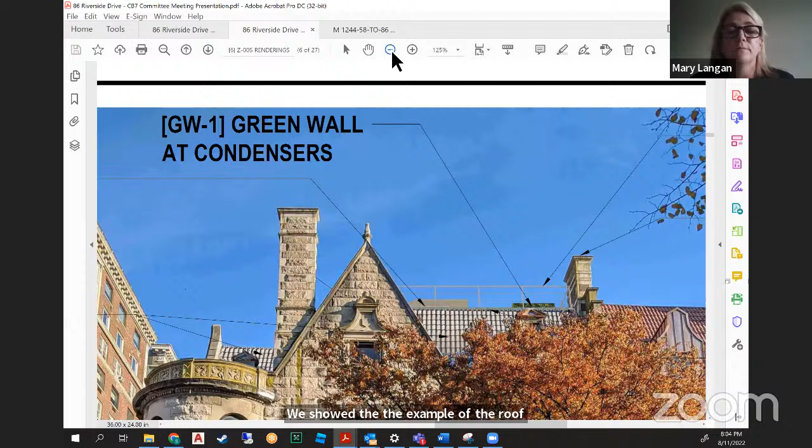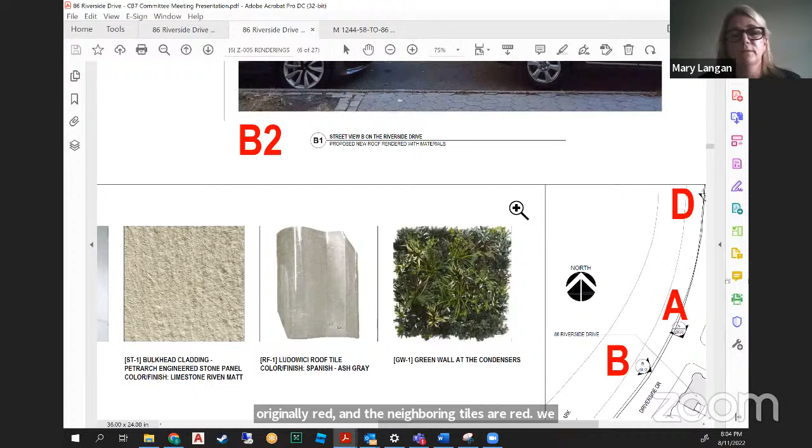And will that stay that way? No, we are replacing the roof. We showed the example of the roofing material. I'm sorry if I missed that. So what are you replacing it with, a gray tile or red? Yes, gray is the proposal. Why gray if that's an applied cladding and the tiles were originally red and the neighboring tiles are red? We don't know if the original tiles were red. The tiles on the roof have a black undercoating and then a metallic coating. So we're proposing to replace it with something similar to what's there, but a gray glazed tile. Is that part of the application before LPC and before us, the replacement of the existing roof? No, this part of the application is for the addition, the rooftop addition.

Right, okay, thanks. Could I jump in again? Yeah, then I want to hear from Jay because he hasn't had a chance to speak about this. Oh, sorry, Jay, why don't you go first? Okay, I think at least I can offer a pause between beating up on this poor applicant.

As far as visibility from the public way, if any degree of visibility from the public way disqualified a project from ever being approved, we wouldn't be looking at this project and many others. So the issue is obviously the degree of visibility, the nature of the project that is visible, its appropriateness, et cetera. So any comment that says 'it's visible, let's just reject it' is not appropriate.

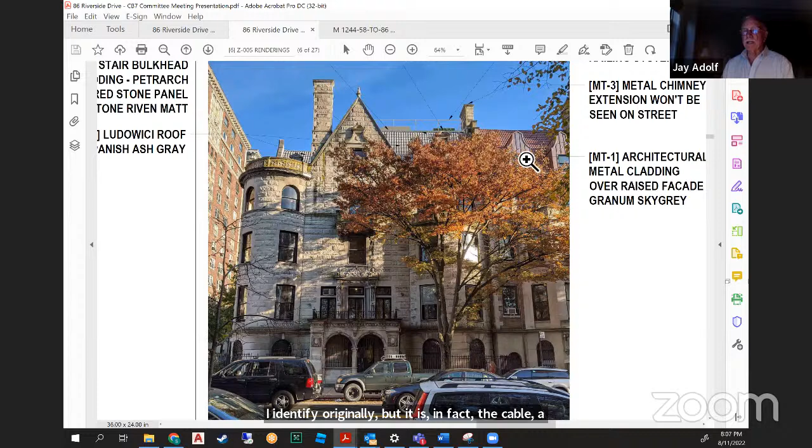I understand that this depiction of the railing was hard to identify originally, but it is in fact a cable railing, and in my opinion is not particularly obtrusive. You would see it much more than that.

Come on. Much more than what? You're pulling the wool over your eyes. No, they're not pulling the wool over my eyes, maybe the railing, but I'm looking at it, it's a cable railing. With this blow up of the photo, I think it's a pretty accurate depiction of what it's going to look like. There it is, there's the railing, you're going to see the railing. It's not accurate. Well, Peter, with respect, what's not accurate about it? It shows the railing. Move on.

Let me just ask a quick question. Well, whatever, you have your opinion, I have my opinion.

All right, so to conclude, as I said, I think primarily the visibility is there, it's primarily horizontal, and I'll reserve declaring my vote until we vote. All right, thank you, Jay. We're on tenterhooks, Jay. No idea. Okay, Mark, thanks.

So I was originally inclined to be supportive of it, since I'm in favor of putting elevators into structures like this. But I take it that this railing, which I find problematic, is driven not by the introduction of the elevator, but by the desire to use the roof as occupiable space, or a rooftop deck or some such thing. Is that a fair assessment?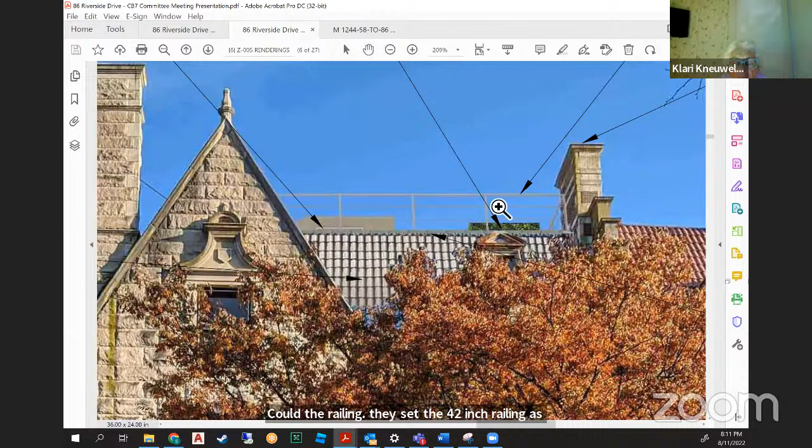So my question is, could the, oh, I'm using my own cursor, but you guys obviously can't see it. Could the railing, the 42-inch railing as shown, be set somewhat back so that it becomes less visible from public ways, while still allowing usable walkable space up there? In other words, could you move this railing back? I think you said if it were a protective railing just for purposes of maintenance, protecting maintenance workers, it would be set back. So the question is, can it be set back?

It could, yes, consistent with the owner's objectives, but not necessarily 100% consistent. But could it be set back in a way that would make it way less visible or materially less visible from public ways? We'd still have the elevator bulkhead, which is a whole nother thing that's very visible. But is the railing movable? In other words. Yes, you are correct, it's movable. And it'd be less visible. That's an issue for me.

Okay, thanks. Can I have to leave, I can't continue, can I vote? What's, nothing to vote on yet. Yeah, we don't have the resolution yet, Peter. What? I think we're getting there, we're getting close.

Page wanted to say something. Yeah, and Page wanted to speak. Could we ask the applicant to put up the section on the roof that shows the existing deck and the two-story addition that you're proposing, please?

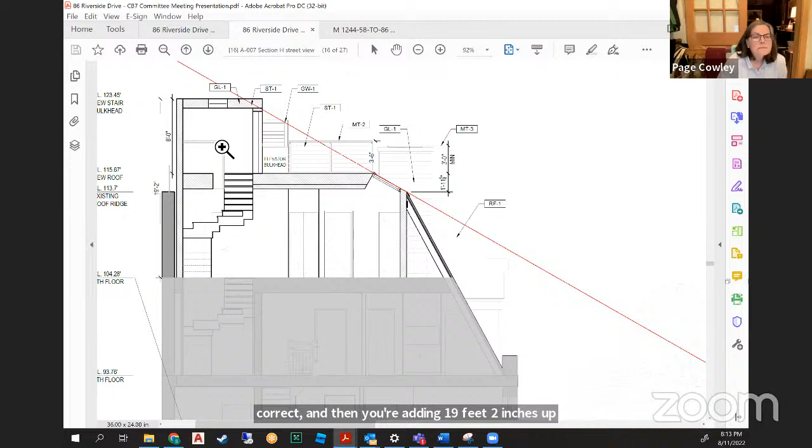That is correct, yes. Is there, because we don't have the companion, a way to see its impact on the adjacent roof? I'm assuming it only goes to the 6th floor roof, correct? I'm sorry, I didn't understand your question. In other words, you're adding 19 feet 2. Where is the companion building, the adjacent one, located?

Could we go to the montage, because I think that will explain it to you, since it shows the before and after.

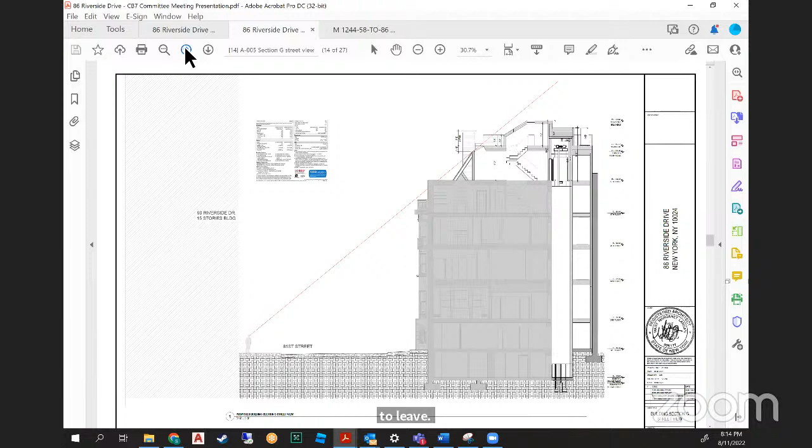Ken, I have to leave. My vote is no, okay? Can't do it. Okay, I leave a vote. I think we're going much too long on this, you know? This is a joke. All right, I agree.

And I'd also like to know if we could promote Eric Bates, who I assume is from the community and seems to have some... I have to leave. I'm sorry. Thanks, all right Peter. Forward, Peter. Sure, okay, I've tried to promote Eric previously. I give up, I'm not going to comment anymore. Thank you. Maybe Eric, if you're there, time to just click the prompt, vote if he's still with us.

It seems that Madge wants to talk also. Yeah.

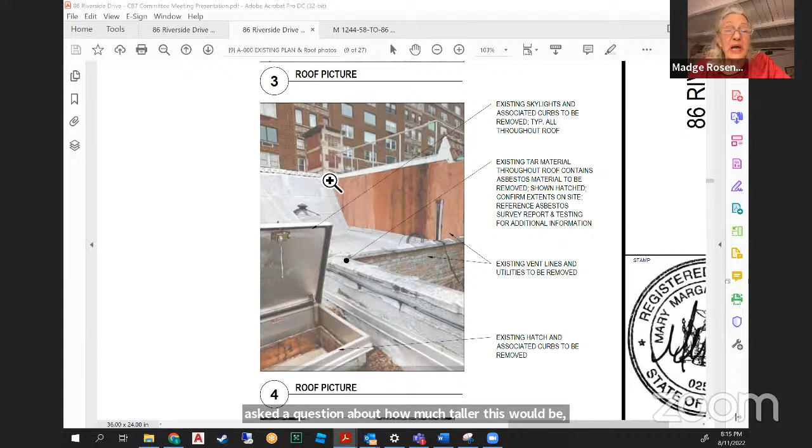I previously asked a question about how much taller this would be, and you said 1.5 feet, I believe, is your response. But when I see pictures like this, that's the height from the ridge line to the new roof line.

But you're adding, how about the bulkhead? How much farther up is that coming? That's 19'2" from the existing flat roof at the rear. That doesn't look like what that picture just showed us.

From the existing roof line, Susan, could you call up A003? When you're adding a whole floor plus - yes, it is a whole floor plus the stair bulkhead. You said 19 feet of a whole floor - that's a very tall floor.

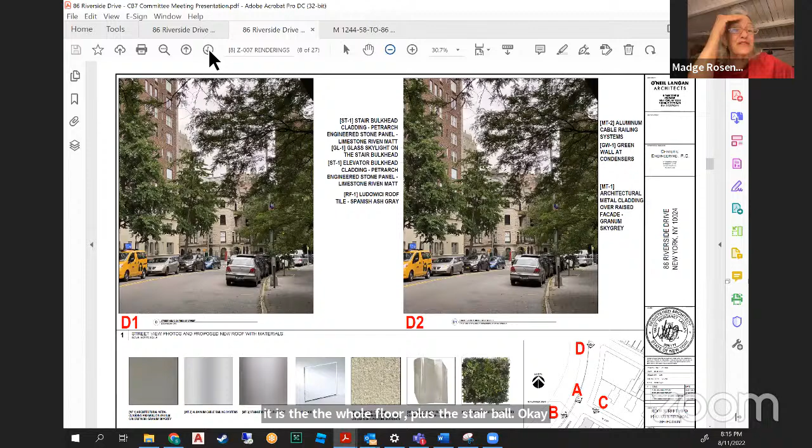It's the floor, then plus the elevation of the new roof, and then the stair bulkhead creates the 19.2 total. So if the existing roof ridge is at elevation 113, and then the new stair bulkhead, which is set back from that ridge line, is at 123. Well, it's impossible to see in any of these pictures.

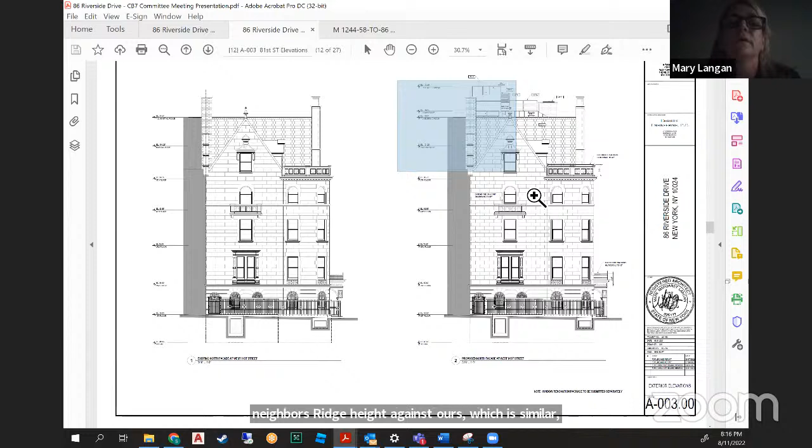All right, did we get an answer to the question of what the building next door - the comparable bulkhead there - is? Was there a way to answer that and I missed it? No, that was not finished. I do not know the height of the neighboring building, but we can show you here. We have the neighbor's ridge height against ours, which is similar, and we can look at it in the photo. So it is the same, 10 feet above.

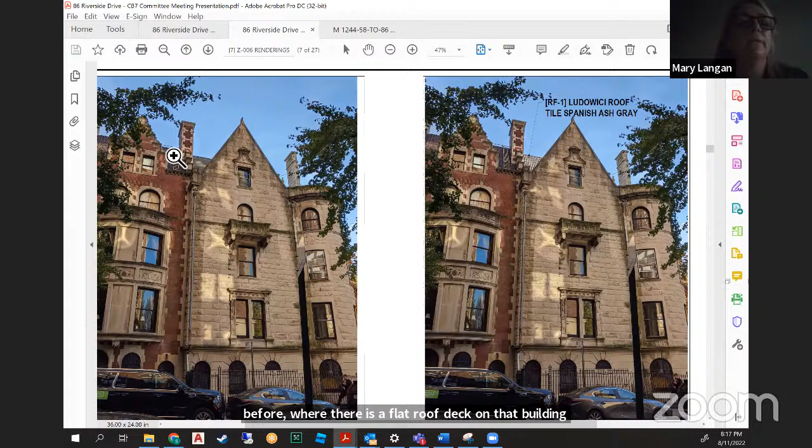Can you show us the photo of the current 81st Street? It's 81st Street, right? Correct. So we see both buildings right now? Sure, the C1 is 81st Street as is, and you can see that's the one we were pointing to before, where there is a flat roof deck on that building, we believe as well. And then on the photo on the right, you can see the current mock-up from the photographs taken.

So you can't see from that streetscape looking across the street - you don't see the bulkhead there. This photo was taken after we did the mock-up, the one on the right. So you're saying if the orange mock-up were visible, we'd be seeing it in this photo, but it's not visible from 81st Street. Correct.

All right, I do want to wrap this up, but I don't want to cut off the discussion, and I see a number of hands still raised. How are we going to take care of this? Madge, are you okay? Yes. Okay, Jay, are you all set? Yeah, I just have a quick comment.

I find it very disturbing, the tone of some of the comments about this application and the applicants. I mean, we have a job to do. It is not our job to beat up on applicants. It's not our function to decide how much space a family needs in their home.

It's not our job to say, well, the hell with it, it's visible, let's vote against it. Our function is to decide if a particular proposed project is appropriate to the individual building and appropriate to the historic district. There's certainly room for disagreement, but I think the comments on visibility have been somewhat antagonistic and exaggerated, and I don't think it's appropriate to take that kind of tone. I'm sorry Peter isn't here to hear my comments, but I'll repeat them if this dynamic happens again. We have plenty of room for disagreement, and people can vote based on how they feel, but we have certain standards of what we decide in terms of appropriateness and how we conduct ourselves. I've found this discussion to not be appropriate at all.

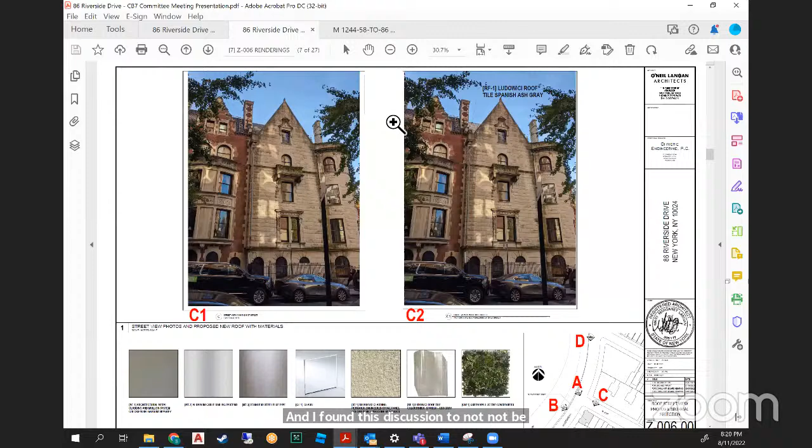All right, thank you, Jay. I see a hand raised from Igor Kral. What's the nature of that? Are you a member of the public? Are you part of the presenting team? Did you just get stuck here in a time warp or something? Igor, you should have the ability to speak. Go ahead. Okay, maybe that's just an error. All right, okay.

So I think we better get to figuring out what our resolution is. Anybody want to take a crack at it?

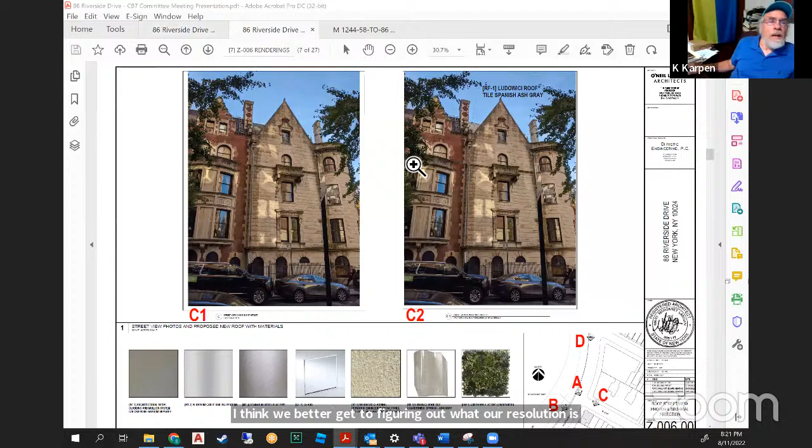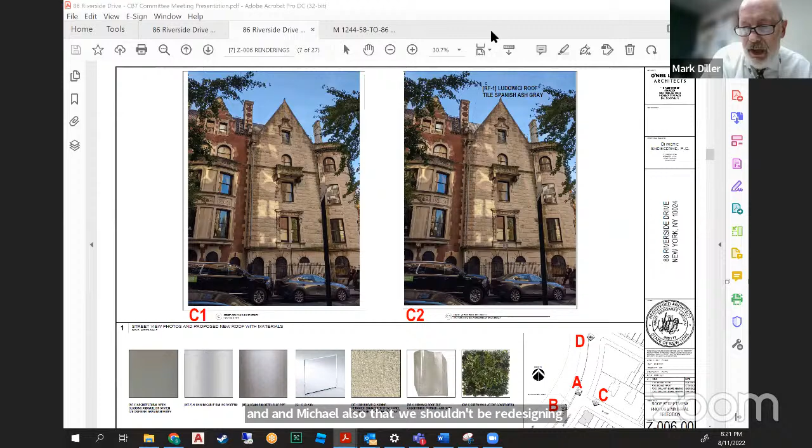So I'll jump in, and mindful of what Jay was saying, I think I disagree with him on the merits of the application, but I also want to make sure we've read the comments in the Q&A from Mr. Bates, who speaks somewhat eloquently about the points of decision we're supposed to be addressing. I'm thankful for those comments, and mindful also that we shouldn't be redesigning somebody's building for them, I think we should simply have a resolution to disapprove based on the overall bulk and visibility. I don't think the choice of materials is bad, so I wouldn't include that. But I think the bulk and the visibility of that bulk are inconsistent with this rather intact Clarence True group. What the hell, where did I get that from? Anyway, that's the bulk. That's sort of how I'd phrase it if that works for folks.

So that would be a resolution to disapprove.

I'm wondering if I could try to parse Mark's proposal a bit. I think what we're looking at, to the extent we have any common reactions, is concerning. When Mark spoke of the bulk, I think he was talking effectively about the railing and the elevator bulkhead. Was there more to it than that, Mark, in terms of visibility? So it's both height and bulk, you're correct to correct me. I'm actually more concerned about the stair bulkhead than the elevator bulkhead, but it's both of those plus the railing for sure, especially with the railing right up. It's going to change the view of that currently intact roof line, or ridge line as the applicant is calling it. So that's the nature of my concern, however we choose to phrase it, if that meets the committee's approval.